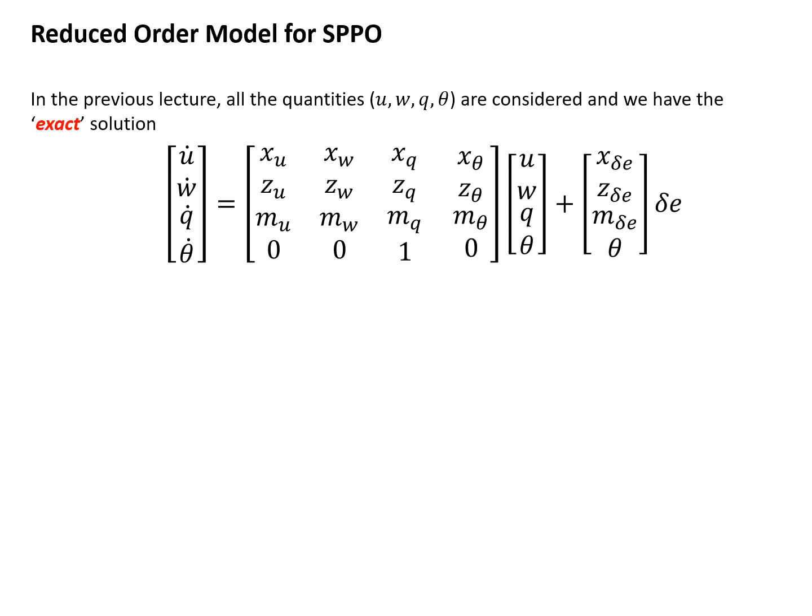Okay, so for reduced order modeling, we don't want to solve the complete equation, but in a reduced way. So we want to eliminate some items or quantities and make it easier to solve. So that's the idea for the reduced order modeling. Okay, so then we have this question: is there a simplified method by neglecting the unimportant variables?

And we may notice small u is a very small fraction of the true airspeed, and theta, that's a pitching angle, can usually be ignored if we use wind axis for the short period pitching oscillation. And alpha, angle of attack, does not vary by more than about 2 degrees in the response, especially for short period pitching oscillation. So for short period pitching oscillation, the angle of attack change is also very small.

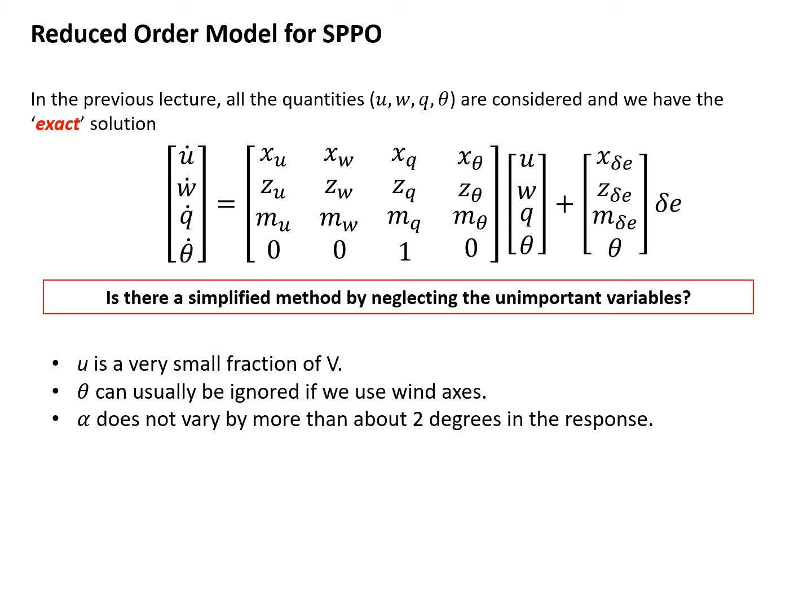So under these assumptions or simplification criteria, we can remove the quantity u and theta. So eventually we only have two equations. Okay, so if we rewrite it, it's like this way. So from four equations, now we reduce the governing equation to two equations. So this is what we have. And we can do some further simplifications.

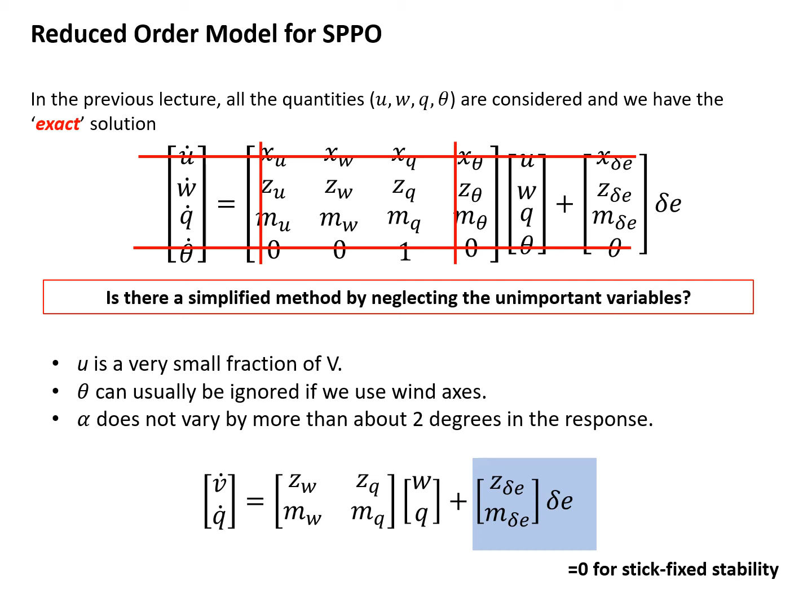As in the beginning, we talked about the control-free analysis, which means that delta E is a variable, it changes, and we need to consider the input of delta E. But now we are looking at the stick fixed stability. Okay, so then the very right hand term is eliminated.

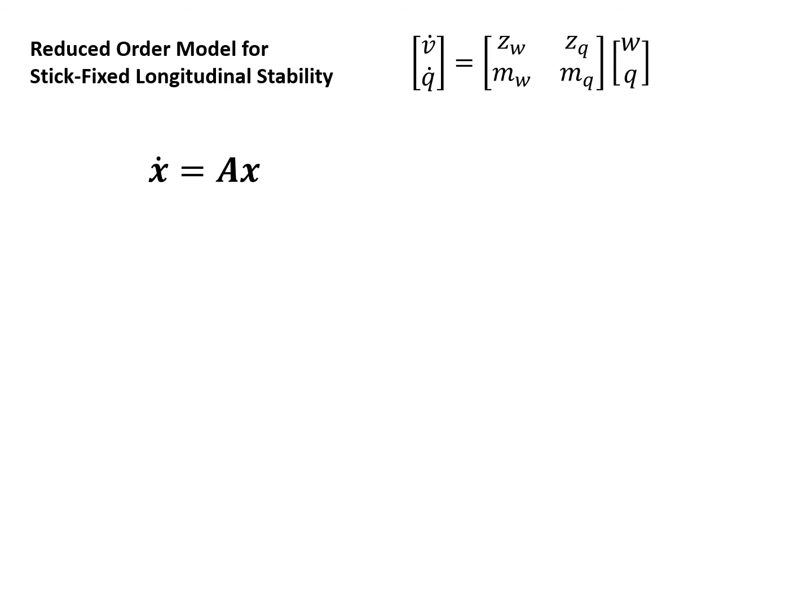Now I pasted the simplified or reduced order equations, governing equations in here, and we can rewrite it in this way in a matrix form. X dot equals AX, and this is in a state space form. So according to the Laplace transformation, that's what we need to do. So we carry out the Laplace transformation for the state space form. This procedure is exactly when we discussed the complete form, right, in a previous lecture.

Okay, so we do Laplace transformation of the state space form, and then we have S times X bar S equals A X bar S. So this is a transformed governing equation. And so we move the right hand term to the left hand. So we have the coefficient matrix SI minus A. And then we want to calculate the determinant of that matrix. So we write the SI minus A here, and we want to make the determinant being 0. So we can do some calculation.

Okay, and you can see we have a quadratic equation about S, and then this is actually what we want, and this is for the short period pitching oscillation. And from here, if we do some analogy with the simple harmonic oscillation, we can have 2 times zeta times omega n equals minus Mq minus Zw, and also we have omega n.

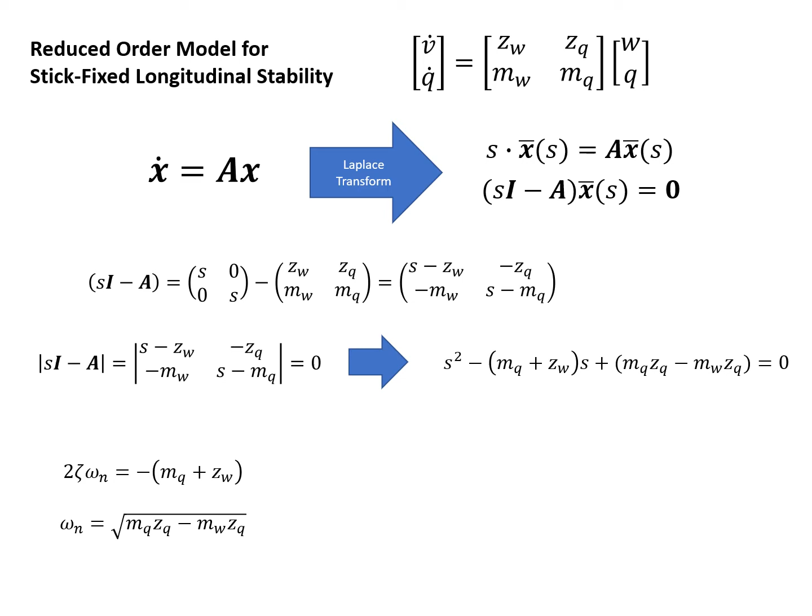And actually we can make it even simpler, do some further simplification because Zw is always small, so it's becoming negligible, and we can remove that term Zw from 2 zeta omega n. And also Mq times Zq for omega n is also very small, so potentially we can neglect that one. And for the second part, Mw times Zq, and we know Zq usually has a magnitude of true airspeed.

And don't worry about here, later on we will see an example. So not for now, we just accept it as a conclusion. And Mw times Zq then can be approximated by Mw divided by Iy times V. And eventually, we have Mw times Zq equals M alpha divided by Iy. That's moment of inertia. Okay.

So now we have our simplified solution. Omega n equals this part, and you can see that the damping ratio can be approximated by this relation. So this is for the reduced order model for stick fixed short period pitching oscillation. And you can see the idea is exactly similar to what we've done before. So we first start with the Laplace transformation and then get the coefficient matrix, make its determinant being 0. Then we have the damping ratio and natural frequency.

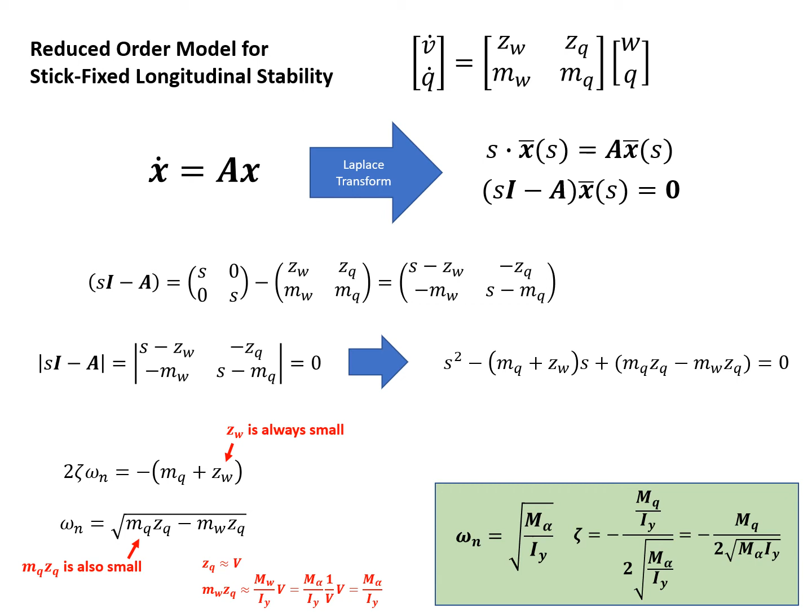We've discussed the reduced order model for the short period pitching oscillation. Now let's start looking at the reduced order model for the phugoid mode. And again, we have these 4 governing equations in here. And in practice, usually Xq is 0. So potentially we can replace Xq by 0.

And also for the phugoid mode, the vertical acceleration is 0, and also the acceleration of the pitching rate is also 0, and so these 3 terms can be replaced by zeros. And let's see about X theta and what we can do about the X theta. So for the longitudinal analysis, the longitudinal force equals minus mg tan theta.

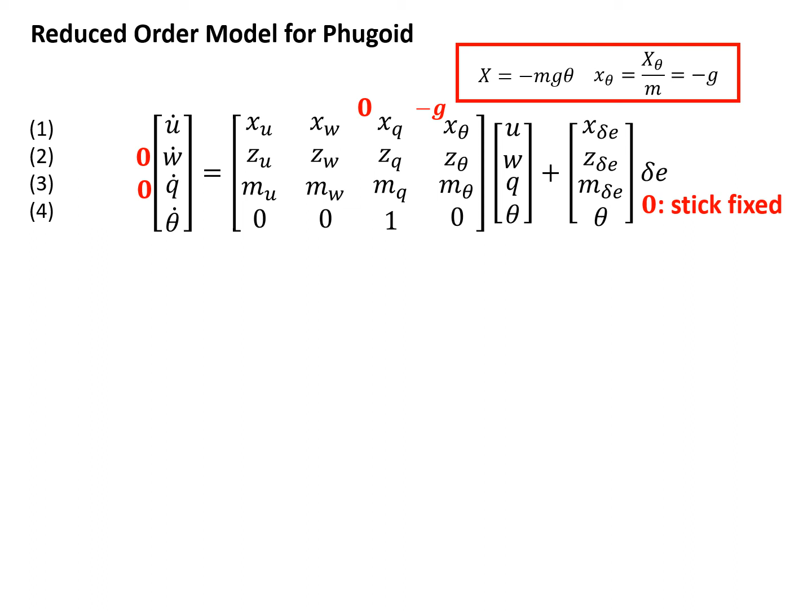So Y tan theta actually should be sine theta, because theta is a small angle and then can be approximated by theta. And then we can do the derivative: small x theta equals big X theta divided by m equals minus g. So later on, x theta can be replaced by minus g. Okay, so now, because again we are considering the stick fixed control, the second part on the right-hand side can be eliminated because it's 0, delta E is 0.

Okay, so now what we are doing is extract equation number 2 and equation number 3 out. And so we have this equation. If we rewrite equations 2 and 3 into this form, W can be expressed as a function of U, and Q can be expressed as a function of U again. Okay, so you may wonder why we write it this way. You will know later. And now what we do is we rewrite equations 4 and 1 together.

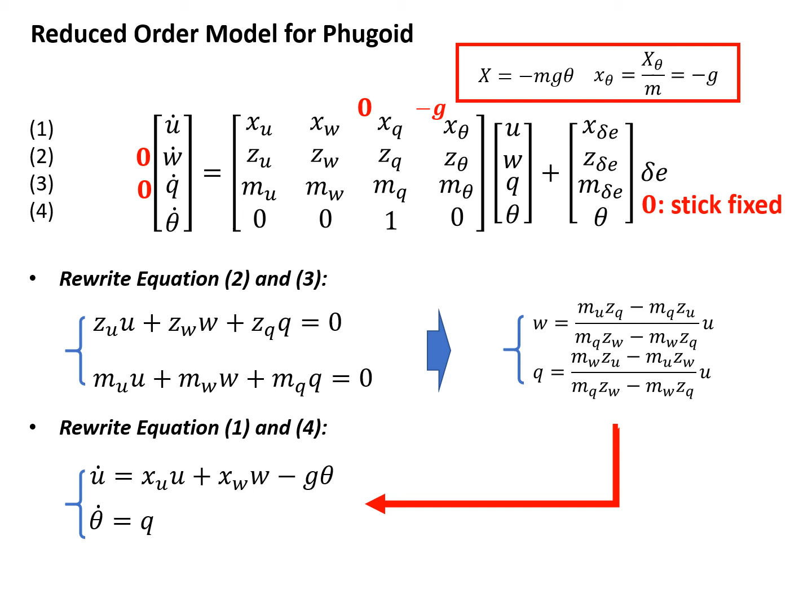So equation 1 is about the axial acceleration, and equation 4 is about theta, actually the rate of theta change. Okay. So now what we do is just plug in the result from equations 2 and 3 into equations 1 and 4. So you may imagine it already becomes a very complicated equation. Now let's move further. We already put them in, so equations 1 and 4 can be written this way. So you see it's becoming more complicated, but don't worry, we will simplify them. So this is what we have.

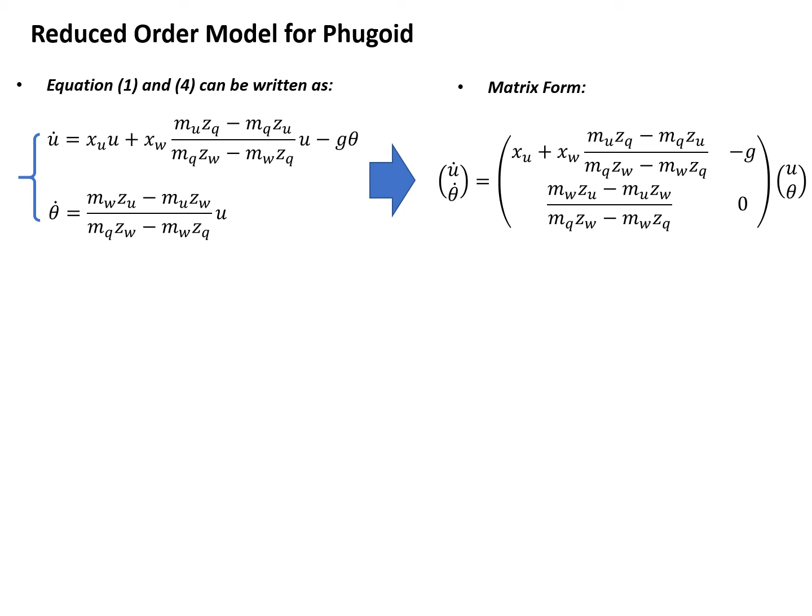And now we want to write it down in matrix form. The left-hand side is the acceleration, and the right-hand side is the original variable. And actually we can see this as a state space form, right? And then, similar to the analysis for the short period pitching oscillation, we can do the Laplace transformation. I'm just skipping that part because it's exactly the same. After the Laplace transformation, we will look at the determinant of the coefficient matrix, that's sI minus A, and the determinant should be 0.

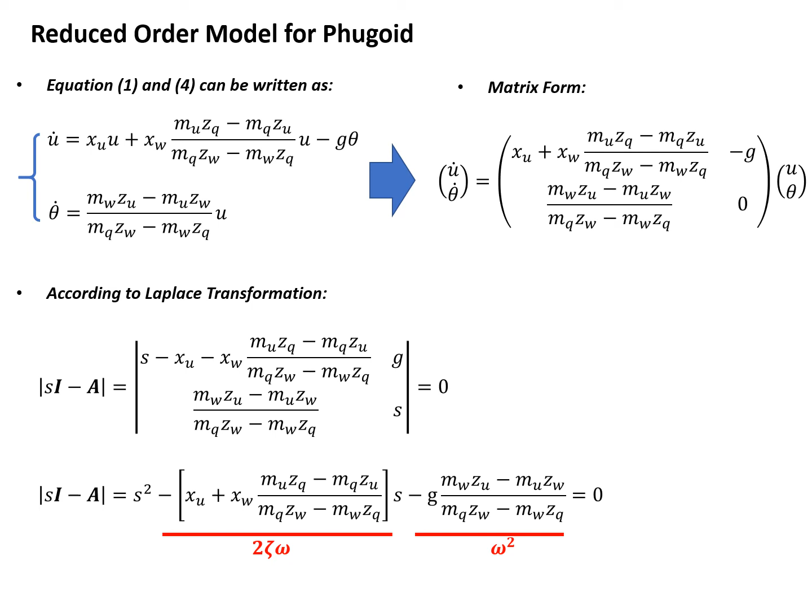And then we can similarly get a quadratic equation. And if we compare again with the simple harmonic equation, we can find its natural frequency and the damping ratio, right? Okay. So now let's see some numbers before we do the simplification. For the Corsair aircraft, the fighter jet we've seen earlier, on the wind axis the coefficient matrix has the following numbers, and you can see there are a few zeros and also a few quite small numbers, especially mu. And I'm copying the expression from the previous slide, 2 zeta times omega equals this.

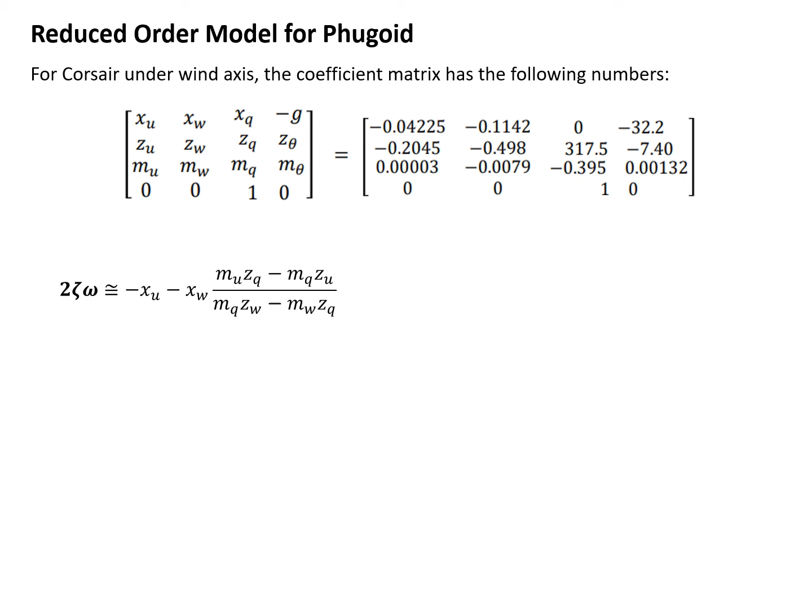And now let's see how we can simplify it, because mu is very, very small, and especially the right-hand side, if we do the calculation, we'll find they are very small. So 2 zeta times omega can be approximated by minus xu, and minus xu is actually minus big Xu divided by m. So this is what we have.

Okay. So we can do something further, because Cxu, that's the aerodynamic derivative coefficient, equals minus 2CD, that's the drag coefficient. And we have Xu equals minus 2CD times half rho V S, which eventually becomes minus CD rho V S. And mg equals CL half rho V squared times S. So this is gravity. And then we have twice zeta omega equals 2g CD divided by V CL. So this is the more straightforward of the simplifications.

Okay, and if we move to the square of the natural frequency, it becomes this, and if we do some calculation by plugging in these numbers as an example, it will become minus g zu divided by zq. And zq, we can move up. You can see that zq is 317.5. It's usually the true air speed. So we can replace zq by V. So eventually, omega squared equals minus g Zu divided by mV.

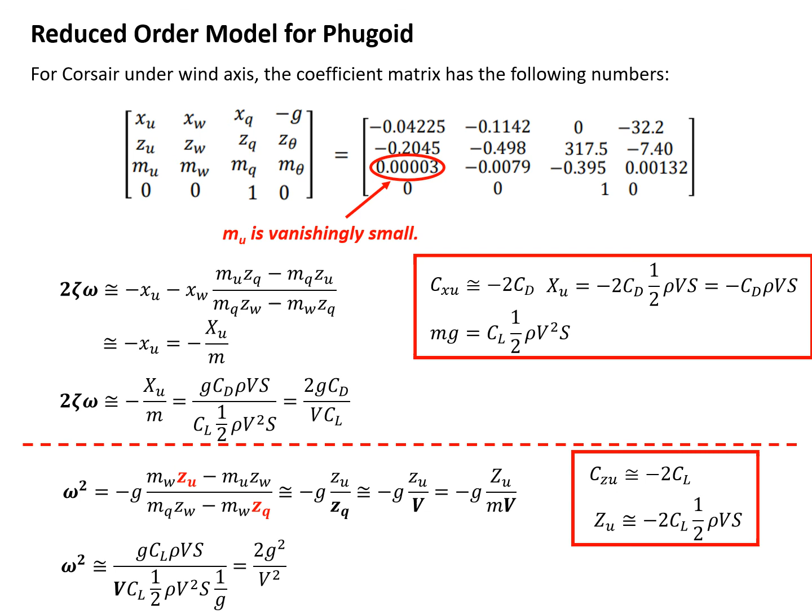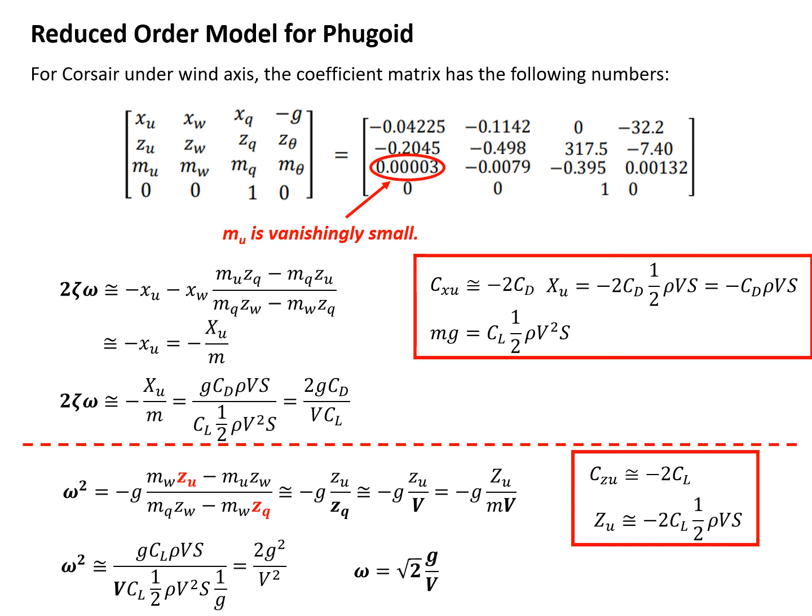Okay, and for Zu we can do something similar as Xu, and Zu can be approximated by minus 2CL times half rho V S. So eventually omega squared can be approximated by 2g squared divided by V squared. So here we have omega equals square root of 2 times g divided by V. And since we already know the natural frequency, we can find the damping ratio. So this is the reduced order model for the phugoid mode. And you can see the principle is actually quite similar to the short period pitching oscillation, how we do the model, but there are different criteria for the simplifications or to reduce order.